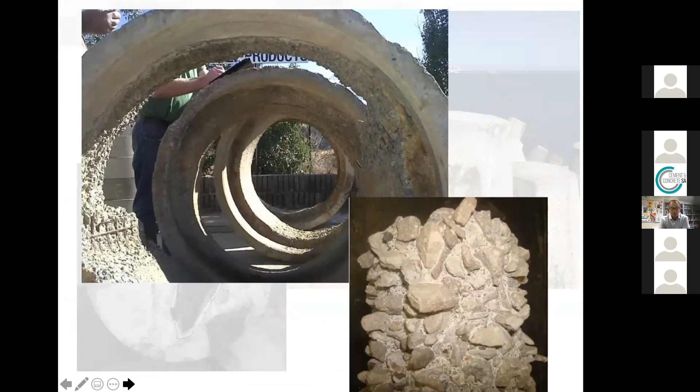We could be talking about acid attack, one of the main issues we have with our infrastructure also in the future, for sewer pipes, for example. We could be talking about shrinkage, cracking in floors or facades and the problems.

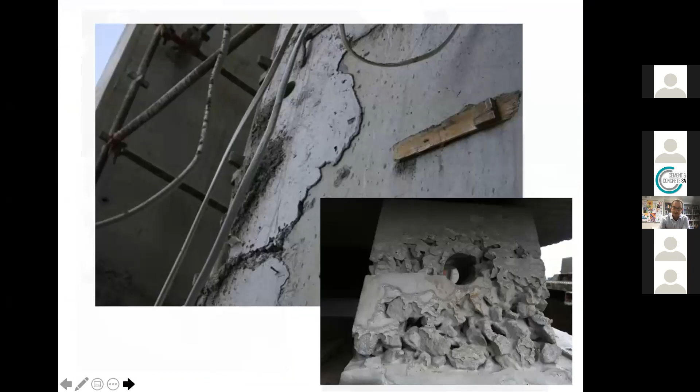We could be talking about construction defects and durability issues, but we are going to focus today on reinforcement corrosion, because that is probably the field in which most of the service life design models, durability prediction models, and design philosophies are being developed and applied worldwide.

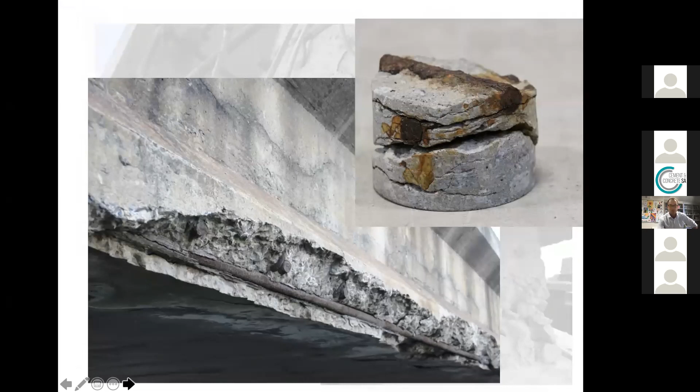And one reason why we do so much research on durability of reinforced concrete structures with regards to reinforcement corrosion at UCT is because Cape Town is located along the ocean, as is Durban and many other parts of the South African infrastructure. And if you look at our infrastructure along the ocean, there are many things you can see.

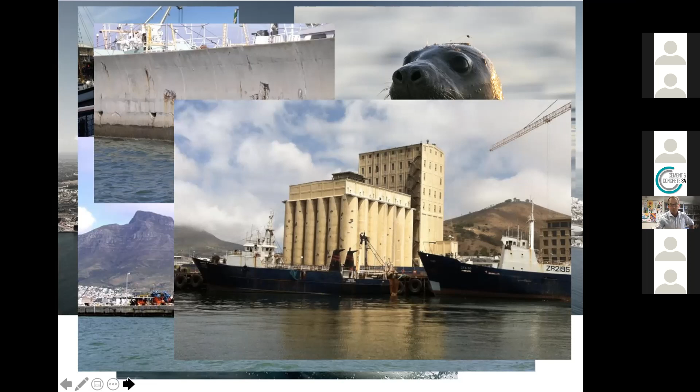So the content of my presentation is I'll give a very brief review of prescriptive approaches for concrete durability design, talk about performance-based design, principles, test methods, also compare what we do to what is being done overseas, talk about current trends, talk about application of these approaches.

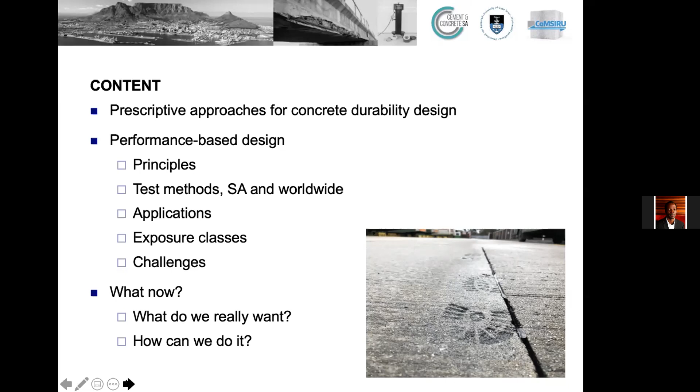There will be changes in exposure classes to be expected in the standards, which I will introduce to you, and put this on the background on some of the challenges we are facing in research and application of durability design methods. And I'll try and tell you after that, what now? What do we actually want to achieve and how can we do it?

Design approaches for durability of reinforced concrete structures. We have prescriptive and performance-based approaches.

The prescriptive approach works on a prescribed concrete mix composition in terms of water cement ratio, cement content, and cement type. Performance-based approaches, on the other hand, work on defining test values.

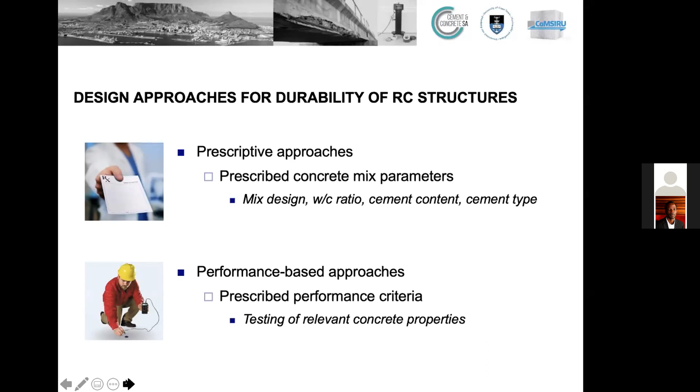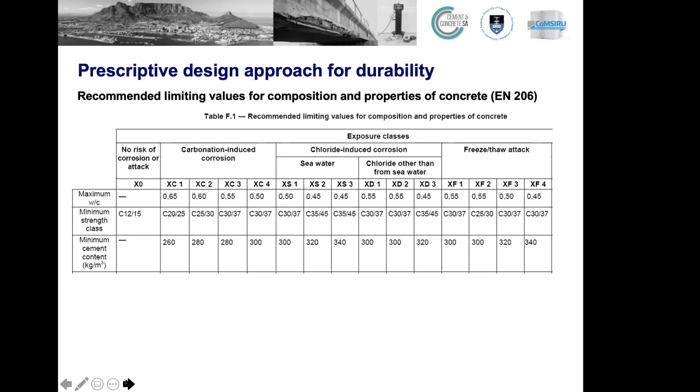Looking at these prescriptive requirements that we find in the Eurocode, which are also very similar to what we find in the current South African standards, for a certain exposure condition, this code gives limiting values for a maximum water cement ratio, minimum concrete strength, and minimum cement content. Essentially this means the code assumes, or the designer is given the directive, that as long as these mix design parameters are met, the concrete will be durable in this particular environment.

The problems with that approach are that there is a weak link between water cement ratio, cement content, and strength with durability. Also this doesn't allow you to exercise innovative or economic concrete mix design, because you always have to adhere to these guidelines, no matter if you find other ways to make the concrete durable. And for the client and the engineer, you cannot account for construction quality and on-site conditions using a prescriptive approach.

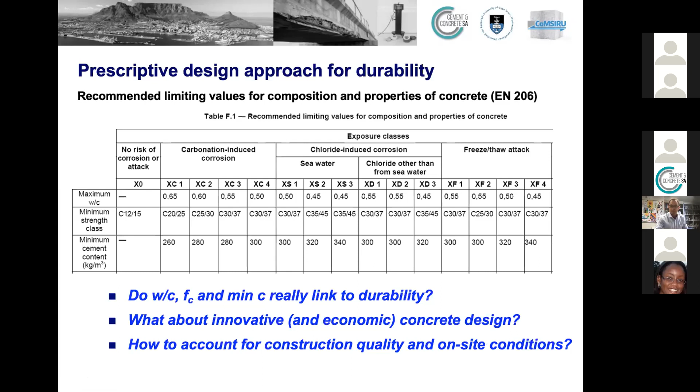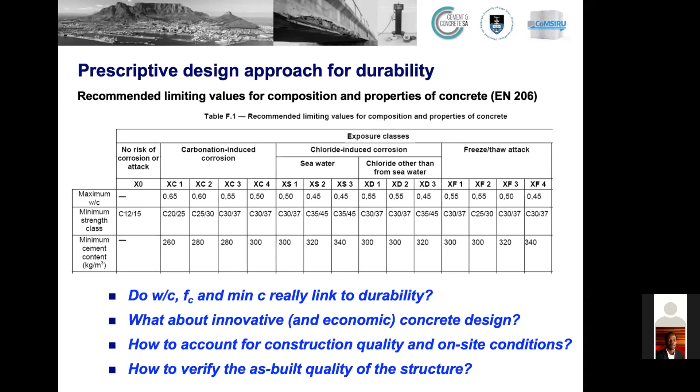Thank you. The last problem with the prescriptive approach is that we cannot verify the as-built quality of the structure. So while this approach has been used for many years to some degree of success, there are many shortcomings which can be addressed by using a performance-based approach.

Here is the definition of a performance-based approach as given by the American Concrete Institute. Essentially, a performance specification defines required test results, which you can measure with a test method, which then form the criteria to judge the performance and verification methods. And now it comes without requirements for how the results are to be obtained.

So essentially, this philosophy says that no matter what you put into the concrete or how you produce it, it is acceptable as long as you verify with a suitable test method that it in fact meets relevant durability criteria.

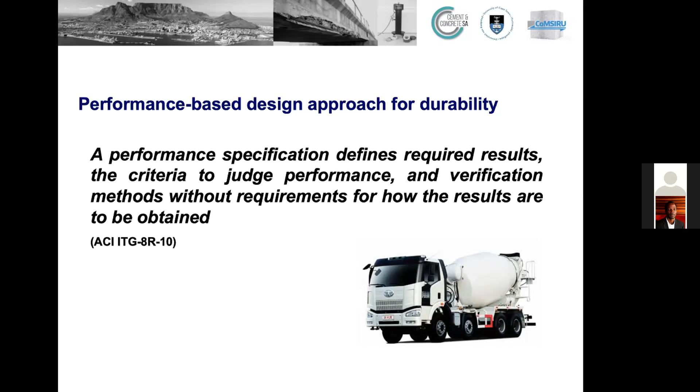Performance-based approaches are of course not new. If you look at, for example, fresh concrete properties and the workability of concrete, what we are concerned about is how well can the concrete be transported, placed, or pumped. How well does it flow around the reinforcement in the formwork? How well can you strike off the surface to give it a certain appearance, and so on.

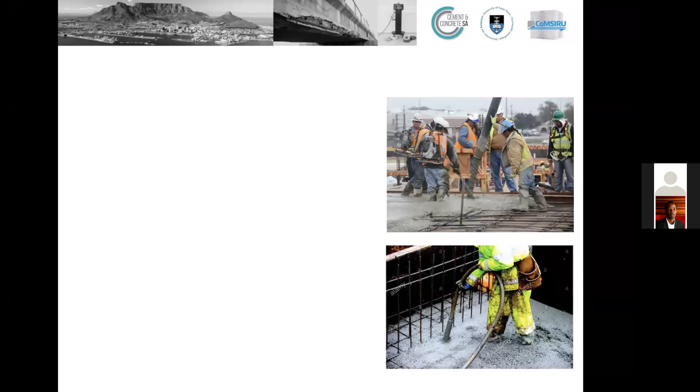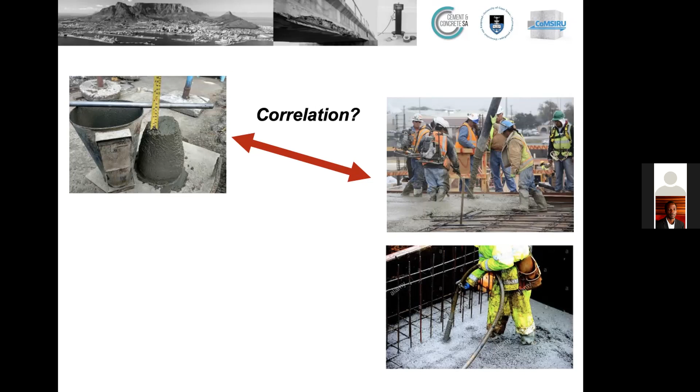All of that relates to the workability of the concrete. And we define workability using the slump test, which of course has got nothing to do with any of those things that I just described. But we have accepted that there is a certain correlation which allows us to use the slump test as a simple indication of what we would expect in terms of workability, even though the test method as such doesn't really reflect on what we're actually wanting to identify.

The same is true for compressive strength. We want to model the structural performance of a concrete structure, for which we need the compressive strength, that is the behavior of the concrete under ultimate stress, which could be very different for a beam or a column or a slab and so on.

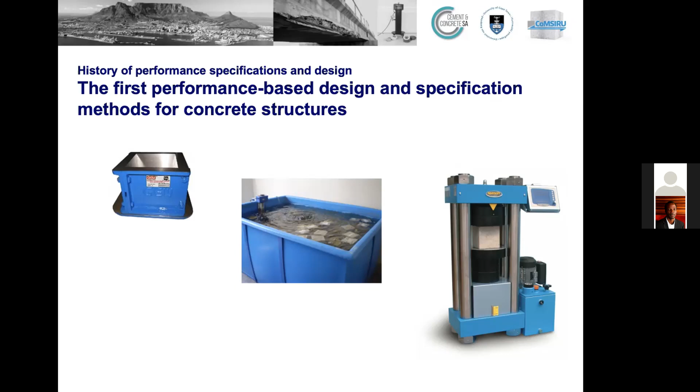How we characterize the concrete for doing so is we cast a cube specimen, put it in water for 28 days, and then put it between two steel plates that move towards each other to crush the concrete. It's actually a tensile test because the concrete fails in tension, but we call this the compressive strength of concrete. And we use that in the design.

And of course, once again, there's a very weak correlation between what we actually measure on the cube and what we have in the structure in terms of stress and strain scenarios and how the concrete would fail in the actual structure. But it's a very useful performance test that we have come to accept.

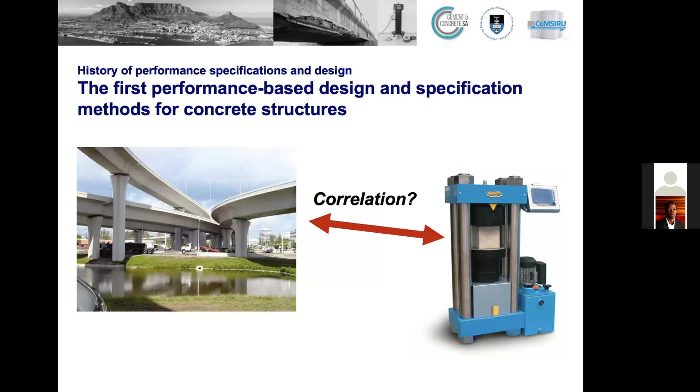Now the same principles can apply when we talk about durability design. In this case, to compare this to the concrete cube test used in structural design, we talk about service life design or durability design. And in our particular case today, reinforcement corrosion.

The most relevant factors that cause reinforcement corrosion worldwide and also in South Africa are carbonation and chloride ingress. So we now define test values that characterize how the concrete is resistant against carbonation or chloride ingress, in the same way as we use the cube test to define how the concrete might behave in the structure under loading.

Once we have defined those test values and once we have test methods, we can specify limiting values for durability for certain exposure conditions.

We can use this approach either in the design stage to identify suitable concrete mixes for a certain environmental exposure and service life, or we can use it for quality control and conformity assessment, to verify that the concrete structure as built meets the design requirements. These test methods give us a good tool to design and test concrete structures to make sure they are durable for the intended service life and exposure condition.

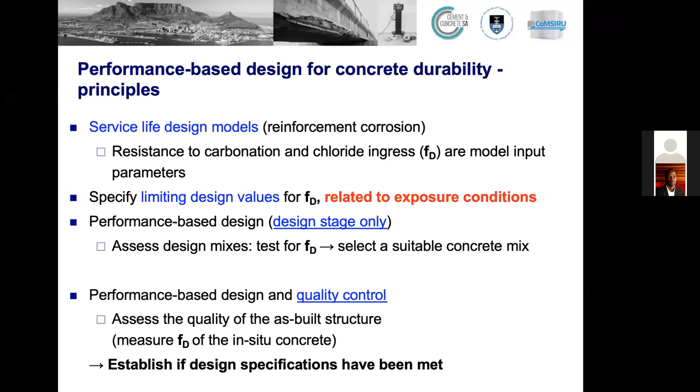Looking at the exposure conditions used to define environmental exposure, there are different ways to apply those in design. We can have standard exposure classes in combination with prescriptive design, picked from a table. We can also have standard exposure classes in combination with performance-based design, which, for example, is something we do in South Africa with our durability index approach, a performance-based approach.

In more sophisticated design environments, engineers can quantify the environmental load, taking into account prevailing site conditions, carbon dioxide concentrations, chloride concentrations, temperatures, and so on, typically done in combination with performance-based design. Quantification of the environmental load can also be done with service life modeling, performance-based design, limit state design, and full probabilistic approaches. So we have four different levels of complexity, each based on defining the environmental exposure the concrete structure is subjected to.

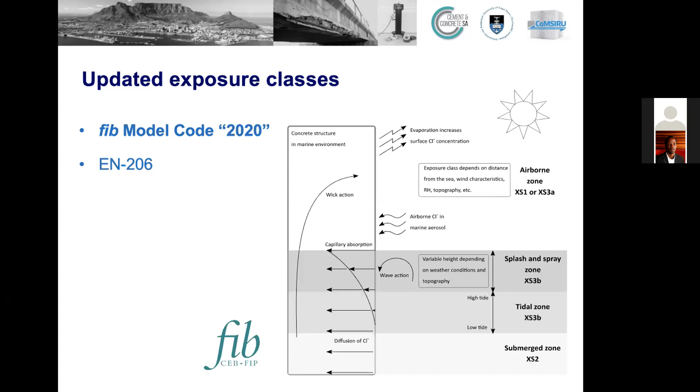Then we have parts of the structure that may be exposed to splash and spray action from the water. Then we have the tidal zone, and we have the submerged zone. Each of these exposure zones comes with a different degree of aggressiveness, and therefore might require different design considerations with regards to mix constituents, mix design, curing, construction, detailing, and so on.

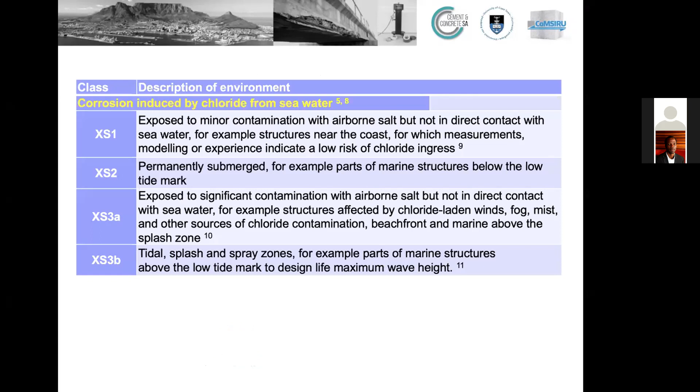Now, what has really changed? This will be the new environmental exposure zones included in the Model Code, and therefore in future most of the other codes. What has changed is that in the past, in the existing codes, we did not assume that airborne chloride exposure is aggressive - it always fell into class XS1, the least aggressive exposure zone for marine structures. In the new codes, there is a statement that you can only assume structures to be in exposure zone XS1 if you can prove there is a low risk of chloride ingress.

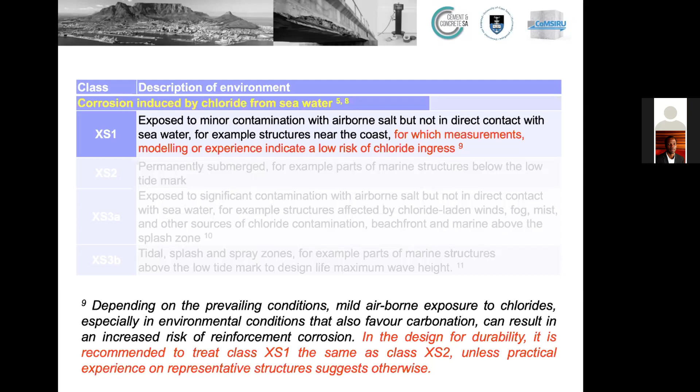That is quite an important change, because we no longer automatically assume that anything without direct contact with seawater is no concern for durability. In the same line, airborne exposure has now been put into the most aggressive exposure class, XS3, where it is defined that the aggressiveness of airborne marine chloride exposure depends strongly on the prevailing environmental and geographical conditions - elevation, wind, fog, distance from the sea, and all of that. So we can no longer just assume that airborne exposure is fine; we have to define whether it is actually a risk or not.

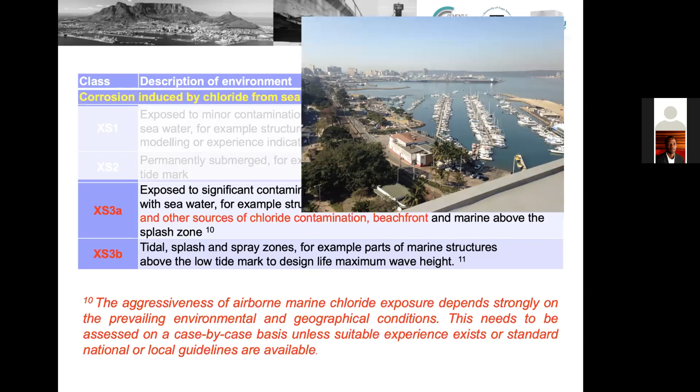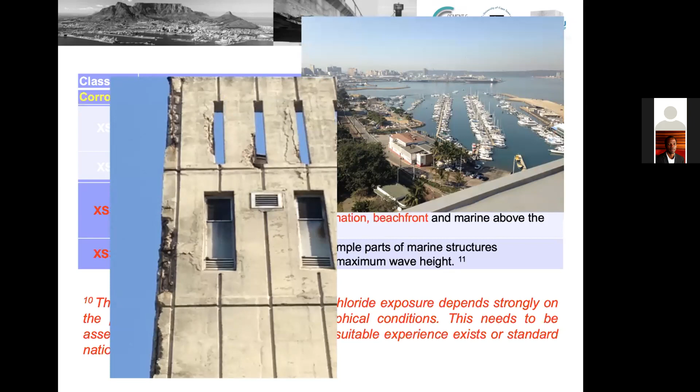Looking, for example, at the problems we have in South Africa - I'm standing here on a roof in Durban, overlooking the harbor. I did a condition assessment of a structure. Looking back at the structure, this is what I was looking at. You can see clearly this part of the structure is not in the splash spray zone or tidal zone - it's all airborne chloride exposure, which has led to severe deterioration of the structure.

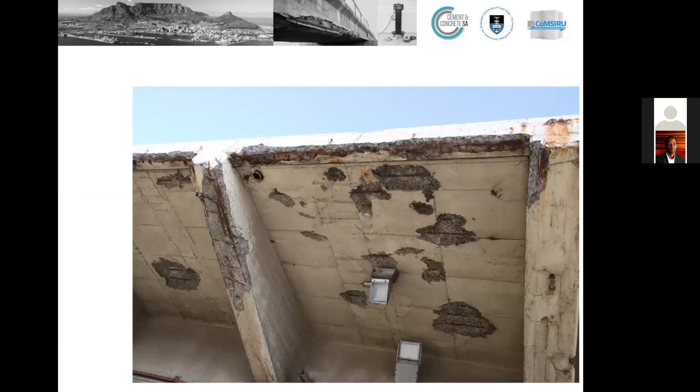The same we can see in Cape Town. This is a structure in Cape Town, also not exposed to direct seawater, but you can see airborne chloride exposure. And on that side it was quite interesting to see that they are warning...

So there are these safety warnings, but what they should actually be concerned about is pieces of concrete falling on the head. It's a risk that is often underestimated. But the point I'm making here is that airborne exposure can be quite severe.

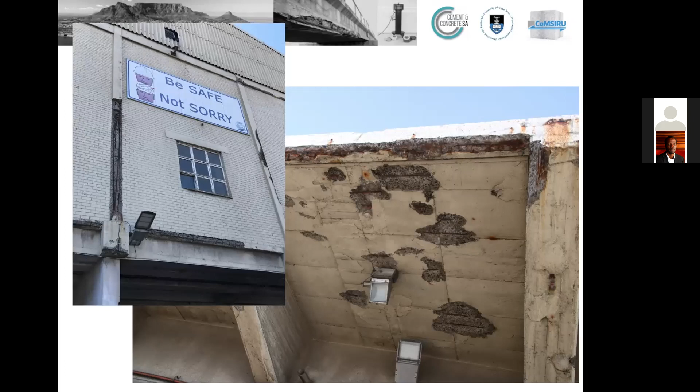And we will in future have to change our design thinking and think closely about where is my structure in correlation to the wind direction and elevation, to make sure we can prevent structures looking like this in the future.

The new codes will also make the recommendation, in order to make design easy, to possibly use the same concrete mixes or the same design assumptions, also cover depth for concrete structures falling into exposure classes XS1 or XS2, meaning airborne exposure that is not of concern, and permanently submerged structures, which typically don't see much corrosion because there's an absence of oxygen that can reach the steel to facilitate corrosion.

Personally, I believe that we should consider airborne exposure, if it is aggressive, to be as aggressive as tidal and splash zone exposure, to make design simple and say either we have aggressive environments or we don't. It doesn't make much sense from a design point of view to really subdivide aggressive exposure further, especially in a conservative design environment.

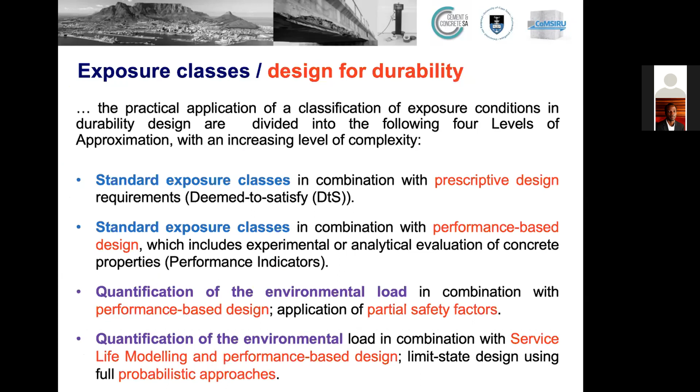Then performance-based design in combination with partial safety factors. That is done, for example, by the universities or by agencies such as SANRAL when they define limiting values that can be used in the more simple way of performance-based design with standard exposure classes.

And lastly, the method that is done mostly overseas in Europe, for example, for large monumental structures, bridges, like large bridges, tall buildings, and so on: service life modeling, performance-based design, and full probabilistic approaches.

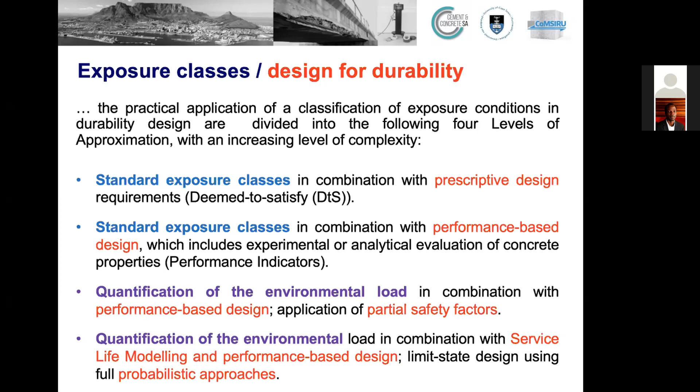There is another method for durability design, and that is called avoidance of deterioration. This essentially includes using materials that will not deteriorate, so stainless steel, or you can use coatings on concrete that prevent ingress. Often engineers don't like to use this because this method is perceived as being expensive and often not necessary.

Engineers tend to shy away from telling the client that they should use stainless steel or a coating and would rather try and make the concrete more durable. Also, if you look at researchers, hardly anyone is doing any research on this because this is just perceived to be not interesting or too simple.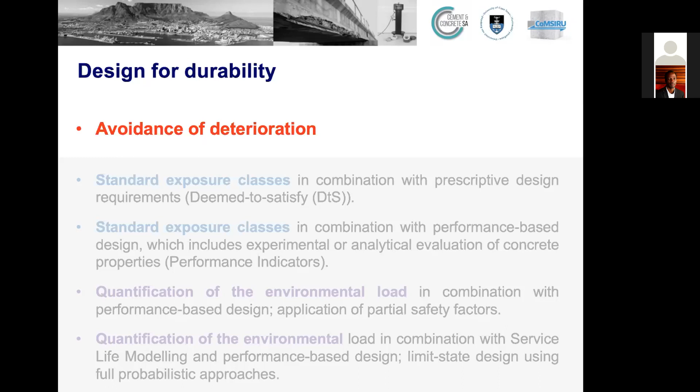So in the community of engineers and researchers, this is somehow being the little annoying sister of proper durability design. And when I talk about annoying sisters, you can see a more recent picture of my kids. You can see how annoying she looks, and you can see how my boys are not impressed with her.

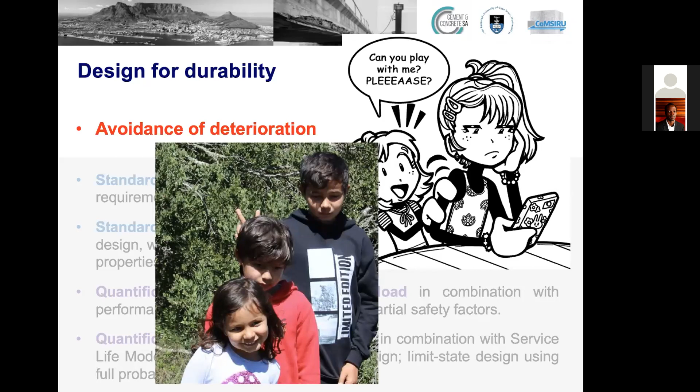I had to think about this when I tried to give this avoidance of deterioration approach a name. I think it is like an annoying little sister that no one actually takes seriously. And I will come back to that point later.

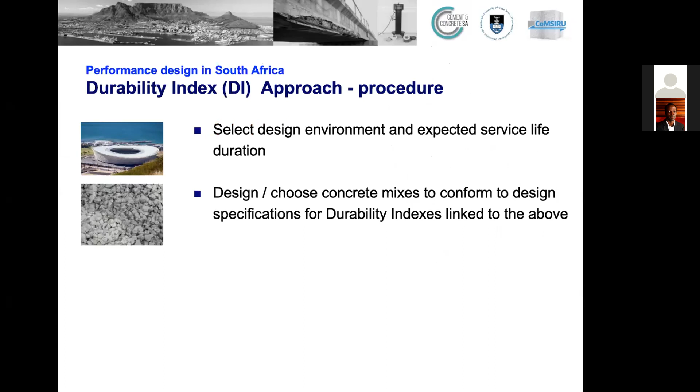Now back to how we do things in South Africa. So the durability index approach, the procedure: the engineer selects a design environment and the expected service life duration. Once we have that, we design or we select concrete mixes to conform to design specifications for durability indexes: OPI, chloride conductivity, water sorptivity.

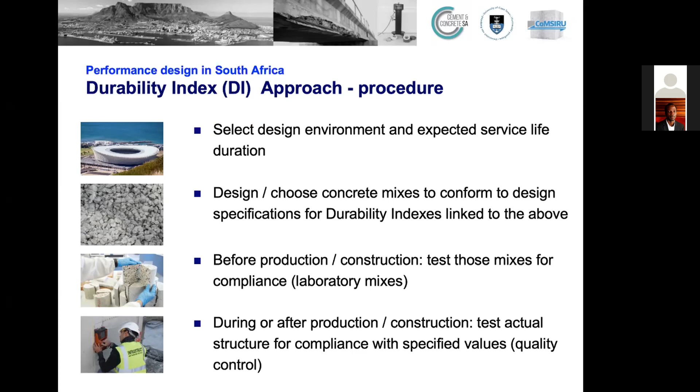Then before production or construction, those mixes are tested for compliance to see whether they are fit for purpose. And then during or after production, we test the actual structure for compliance to see whether it conforms to the specified values. That is the very simple structure of the performance-based approach that we use in South Africa.

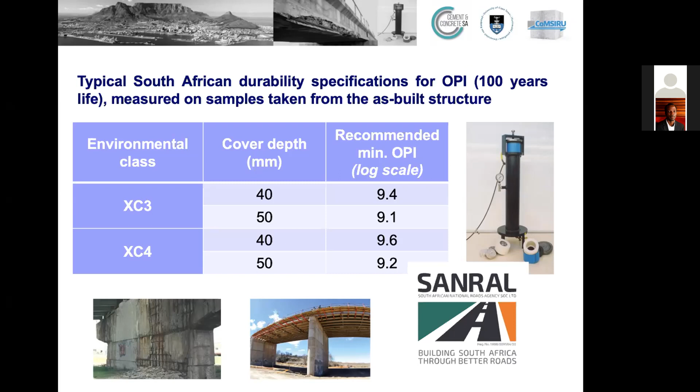And most of you might be aware of this simple example. SANRAL has implemented this, and that's an extract of the design requirements for national infrastructure, bridges, culverts, and so on, for a service life of 100 years. You get, for the different environmental exposure classes and cover depth, certain limiting values for the oxygen permeability index test specified.

Looking at what's happening worldwide, what has been implemented in South Africa, thanks to Edwin Mosley, who I saw is in this meeting. Hello, Edwin. Thank you very much again for supporting this approach, which really is cutting edge, because South Africa is still the only country worldwide using performance-based approaches on a large scale, and has done so for about a decade.

Whereas most of the other countries, or actually all of them worldwide, are still stuck trying to develop suitable test methods, calibrating test methods with service life models, developing limit state design models to then define limiting values for the test methods they are using. But it is certainly a huge trend worldwide that all the major regions - North America, South America, Europe, Asia, Australia - are trying to develop their own performance-based approaches. At the moment the main national guidelines are being updated, including the Eurocode and the FIB model code, and all of these contain much more information and guidance on using performance-based approaches for durability than what you would have found before in the codes.

So certainly we are on the right track in South Africa with our durability index approach.

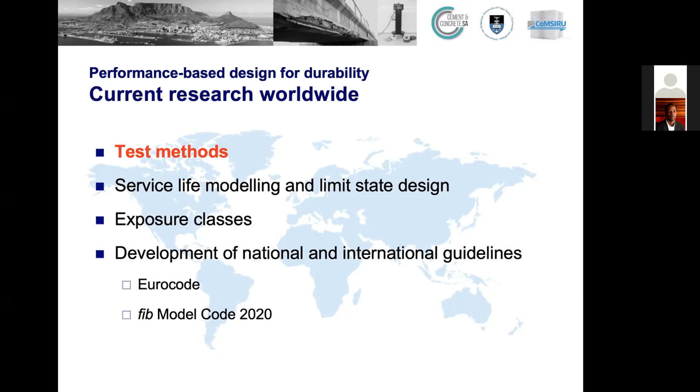Looking at test methods, there are different test methods available throughout the world. We have been involved in some research where we compared different test methods for durability characterization of concrete. We spent some time at a laboratory in the Netherlands and compared different test methods from around the world, from Europe, North America, South America, and Asia. We had all these different experts coming together to try out their test method on these precast concrete elements to see how those test methods compare to each other.

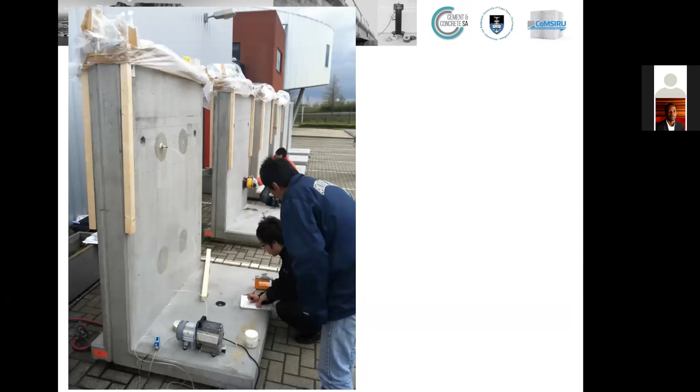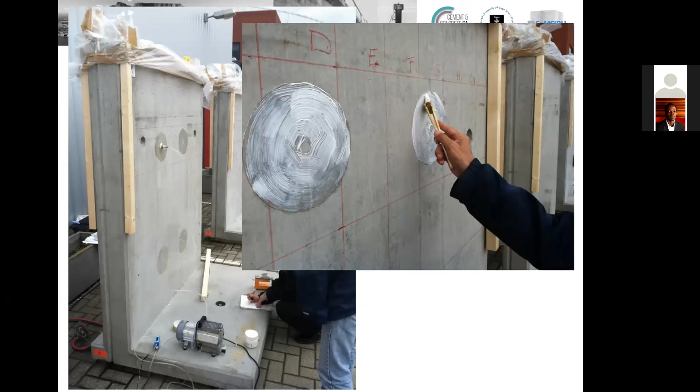What you see in this picture is a Japanese method which measures oxygen or air permeability on concrete, where silicone is applied to the surface with a little center remaining without silicone. On the little center portion, as you can see on the left, the oxygen permeability is measured, whereas the neighboring concrete surfaces are sealed off. Then you can just remove the silicone after measurement.

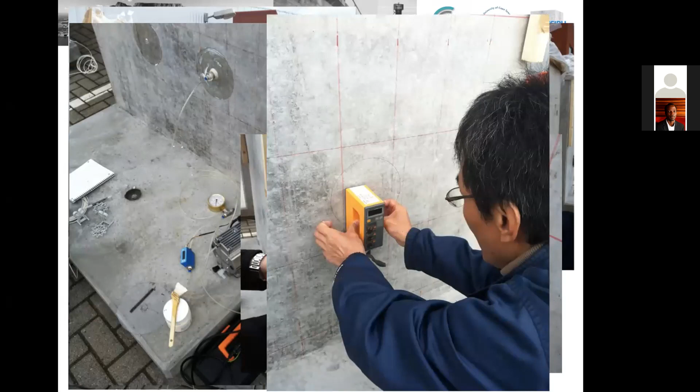Those measurements taken in situ normally rely on using moisture measurements of the concrete as a calibration for what you have measured. We don't do that in South Africa because we take samples from the structure and test them under specified, controlled conditions in the laboratory. So we don't have to account for the moisture content, which is one of the problems of most in situ based methods - you always have to interpret your penetrability test methods with the prevailing moisture condition in the concrete. If you measure these values in different seasons, you would get different values, so you have to interpret the concrete quality accordingly.

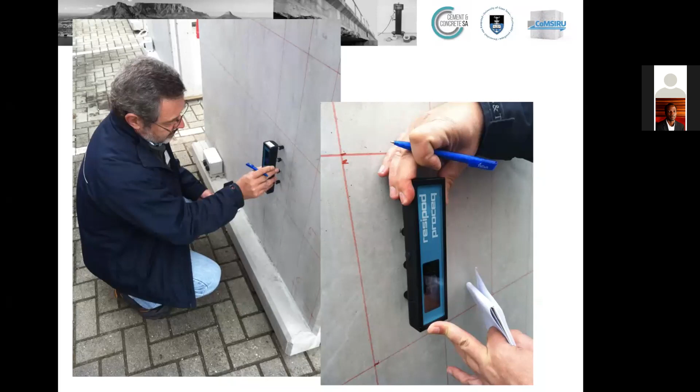Here you see resistivity being measured. We have a similar test - we measure chloride conductivity, again on lab-based samples. Resistivity is the inverse of conductivity, and this test method is largely used in Spain and South America to predict chloride ingress.

Here you see a method from Northern Ireland, where in a localized spot on the surface you expose the concrete to an actual chloride solution to measure how much of that chloride solution enters the concrete, determining the chloride ingress resistance of the concrete.

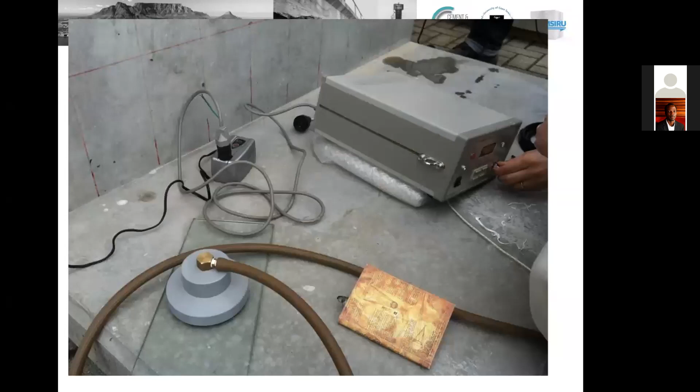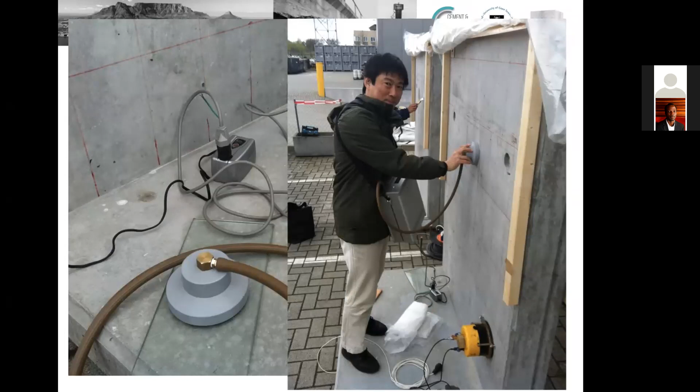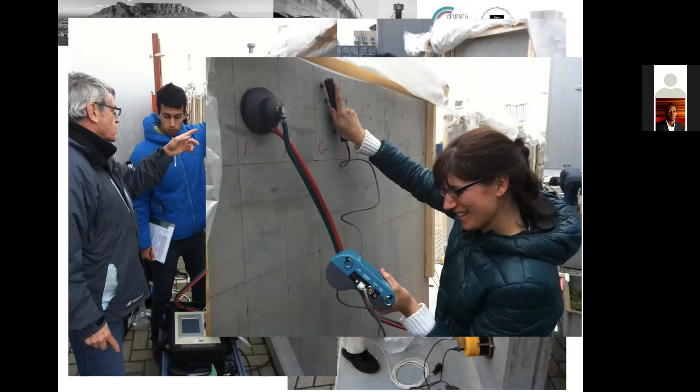Lastly, this is the Torrent test, which measures the permeability of the concrete in situ. A very useful test, similar to the other Japanese test method I showed you, but much more practical. We have also worked with this test method a lot in our laboratory, and it's probably the leading test method worldwide applied for designing concrete structures for carbonation and chloride ingress - the Torrent tester that you can use in situ.

We have compared the Torrent tester to our local oxygen permeability index test. They both work on very similar principles in terms of measuring the permeability of concrete under a pressure gradient. We compared the South African design approaches to the Swiss design approaches where this method is being used.

One way to do this is to characterize the concrete. In our case, we say we have very high permeability, moderate, and low permeability. In Switzerland, they talk about poor concrete quality, good, very good, and excellent concrete quality. We tested dozens of concrete mixes to find that in nearly all cases, we would place the concrete in the same category of quality, which confirms that both these methods have similar merits in identifying the quality of the concrete - quite encouraging.

At the moment, we are trying to identify how we can in South Africa maybe use a combination of the Torrent tester and the OPI test to make use of the advantages of both methods, and more on that in future research. Now, one of the outcomes of all this testing we did on those precast elements with all these methods - we used the test results to rank the concretes in terms of quality.

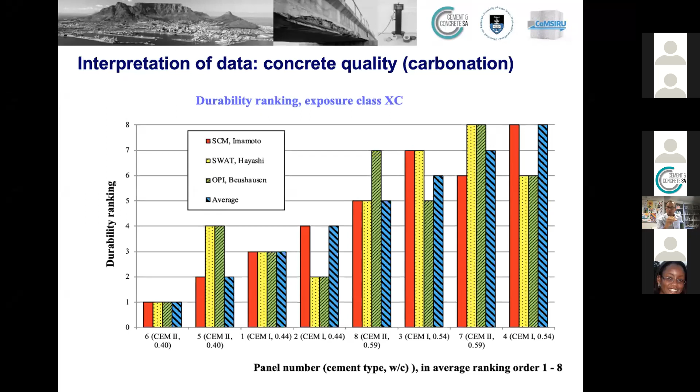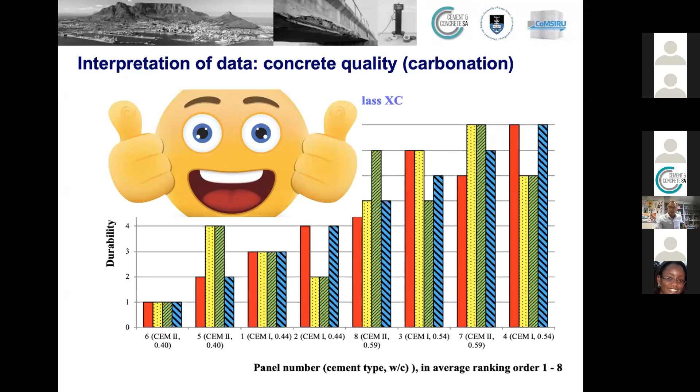What you see here is different methods used to design concrete for exposure class XC, which is carbonation-induced reinforcement corrosion. And what is nice to see here is that, with a bit of scatter, all these methods can agree on the principal quality of the concrete. So I would take this as a positive sign to say that worldwide, developments have led to test methods that give us a similar picture of the quality of the concrete. This confirms that we can use these test methods in the design and quality control of our structures.

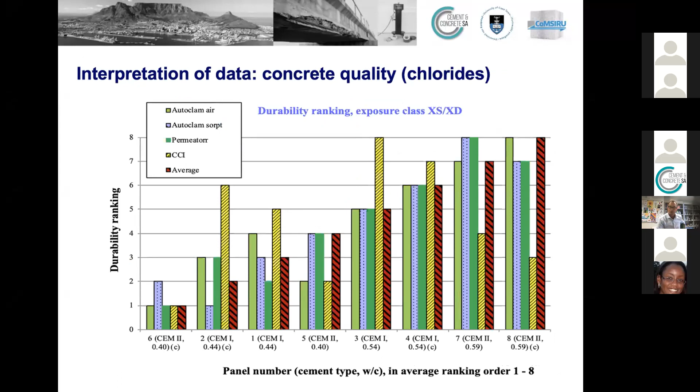Looking at exposure conditions related to chloride ingress, we had a very similar picture where on average the test methods tended to agree. So once again, thumbs up, we are on the right track. However, we also compared the service life prediction, where we use the test values obtained to predict or quantify the service life of concrete structures. And there we have totally different values for different concretes. For example, for concrete A, the values would range between 25 years to more than 100 years. So there was no consensus at all.

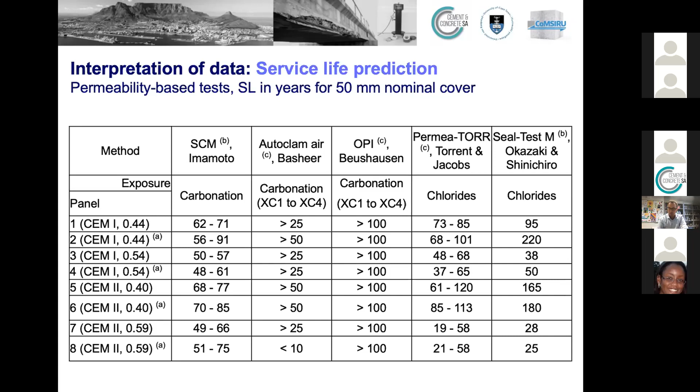So all these methods, while quite useful in rating the concrete in terms of quality, and therefore whether a concrete is more fit for purpose for a certain application than another, they failed in giving a reliable quantification of the actual service life. This tells us that all these complicated methods of designing for durability and probabilistic approaches might actually be quite vague. So I think there's a bit of a warning here as to how we should use all these methods.

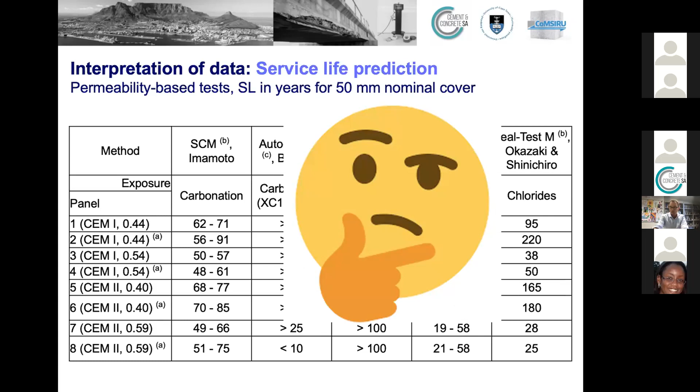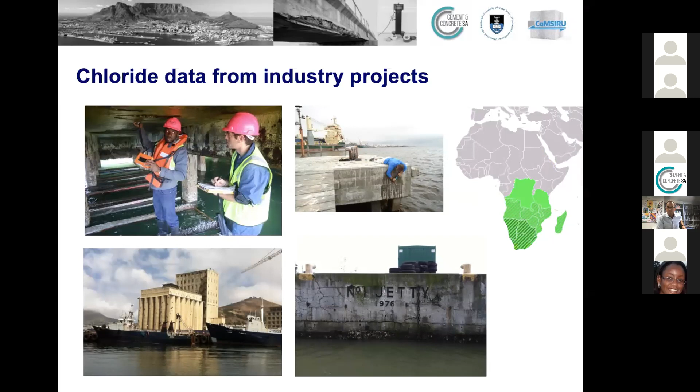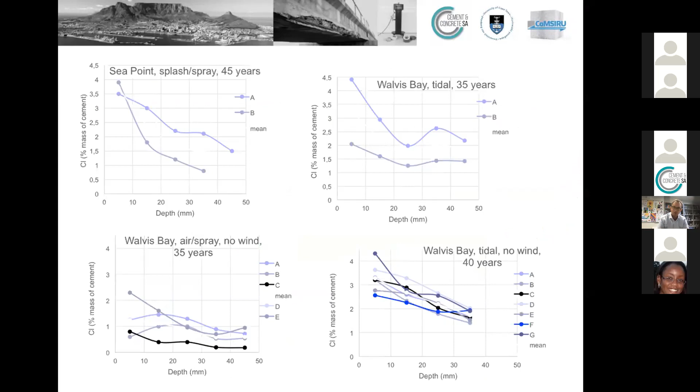To investigate this further, I'm going to give a brief review of some test results on chloride ingress that we obtained from different structures along the coastlines of Southern Africa. Summarized in the various graphs, we took different core samples from a particular structure, from similar elements, and you can see how the test results differ even though they were taken on the same structure. Some more examples here. So what we can see from this is that we got very high variability of test results, even when different samples are tested from the same or neighboring elements.

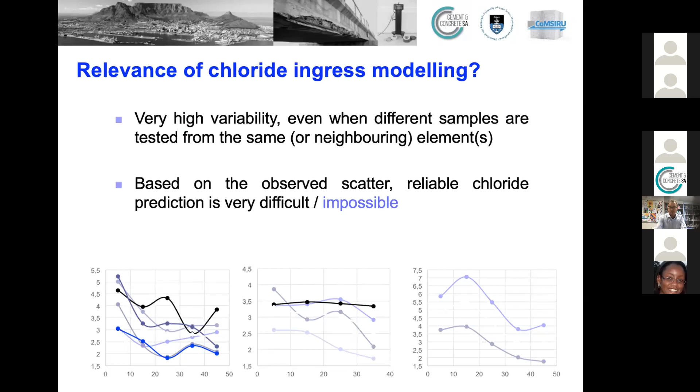Based on the observed scatter, reliable chloride prediction is very difficult, if not impossible, to achieve, which once again speaks to the point that it is quite difficult to model durability in a way that gives us a quantification of the service life. This points out that these more complicated methods to design for durability might be slightly inaccurate. So when we use our service life models and diffusion models to model chloride ingress, the question is: how applicable are these really in the field?

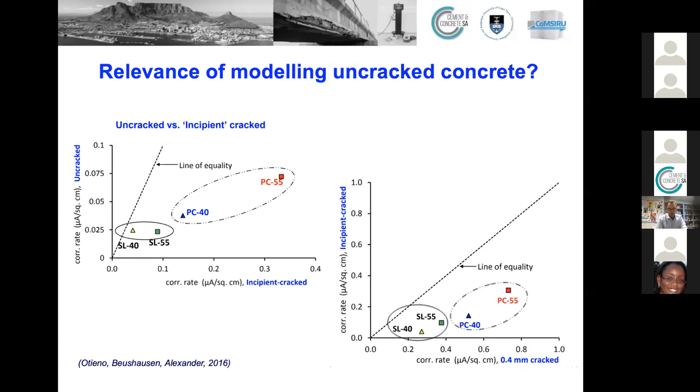On the bottom right, we are comparing hairline cracks to cracks of 0.4 millimeters crack width. So what these graphs show is that even though we measure penetrability on uncracked concrete samples and use that in our service life models, in situ we can possibly very often expect much higher corrosion rates, because our concrete is very often cracked from shrinkage or structural cracks and so on. This once again speaks to our approaches for service life modeling not being very reliable or relevant.

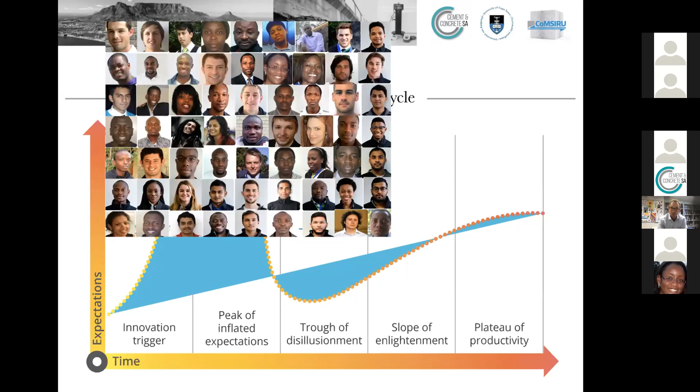Normally after about 2, 3 or 4 weeks, they are right up there and they are full of motivation and they think they can change the world and they have it all figured out with their research. And as they go into the literature, they find out how complicated it is, and how little influence their work might have on the overall picture, and they fall into this stage.

If they take 2 years to do their masters, they maybe hover around here for about 16, 17 months, and slowly we help them out of that through good supervision, so that at the end of their masters, they come up with something that is actually quite useful and forms one of the puzzle pieces we need to make a good difference to our engineering society.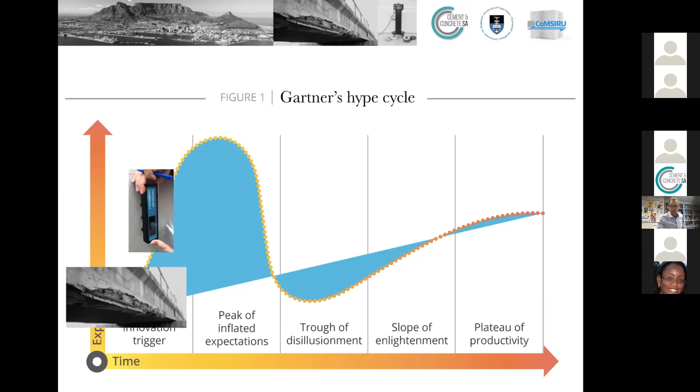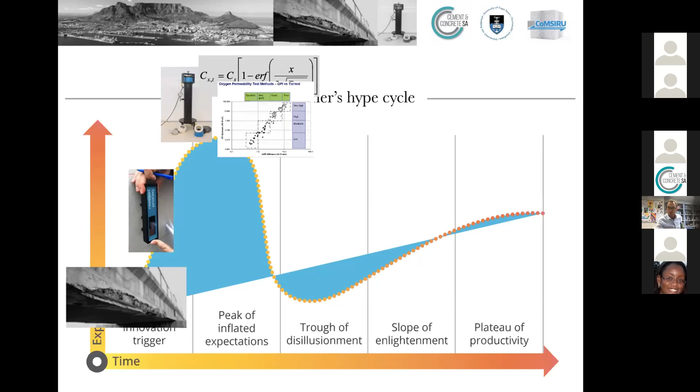Look, applying the same principle to durability design and looking at my own experience here, this is now my Gartner's hype cycle from the last 20 years. Starting with the problem of deterioration of our infrastructure and how urgent it is, followed by all the nice developments we've made in test methods, durability design, service life modeling, chloride ingress modeling, our test methods comparing to overseas test methods. That's all absolutely awesome and points in the right direction. If I then think about the limitations in terms of accuracy and cracked concrete versus uncracked concrete, I wonder whether we're actually maybe trying to be too positive.

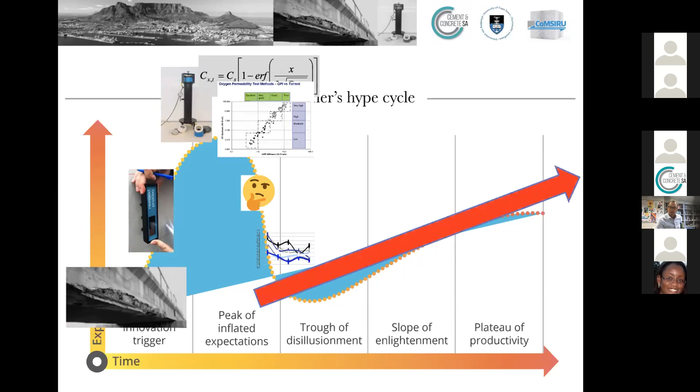But looking at how we can get back up again in terms of making sense of all this, I think about how we need to apply our knowledge and our research here. We need to know the limitations of our durability design approaches, and we need to use the approaches we have in a sensible fashion to make sure our concrete structures are more durable than what they would be otherwise. So we accept the limitations, because overall our aim is to improve the durability of our structures.

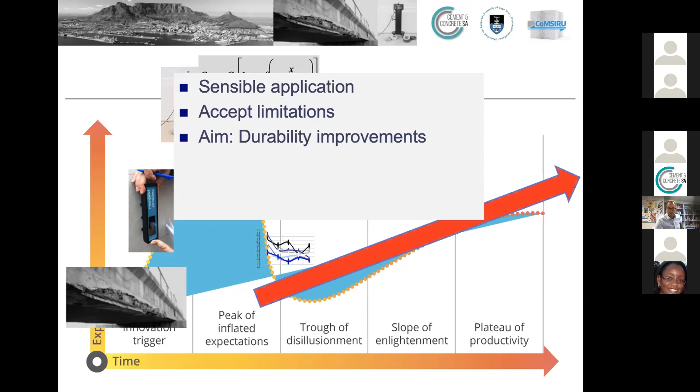And I believe with this performance-based design, even though it has limitations, we certainly can much better design structures for durability compared to the traditional prescriptive approaches. Also, of course, these test methods allow us to do proper design specifications, quality control and conformity assessment. So I do believe that we are on the right track, even though these approaches might not give us as much as we had hoped maybe 10 years ago. That is my personal assessment of what is being done worldwide in terms of durability design.

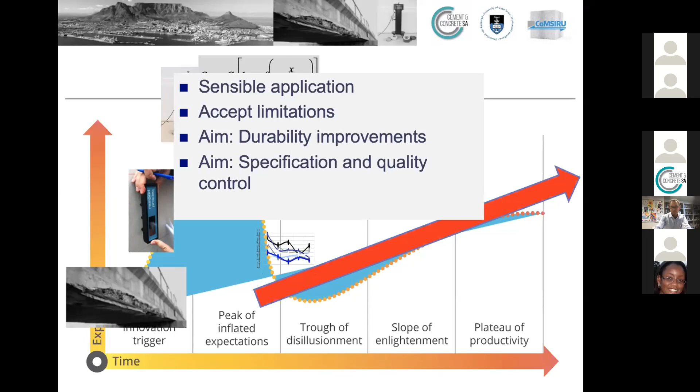Coming back to the actual aim, the underlying aim of all of this - service life modeling, durability design, exposure classes - all of those are just objectives or methodologies to the aim of providing more durable concrete infrastructure. I think there's a simple solution. Coming back to this little annoying sister that I mentioned earlier, looking at the avoidance of deterioration approaches.

So we have recently done quite a bit of research on using hydrophobic coatings on concrete to increase the service life. This is a paper that you can expect to come out sometime soon in Concrete Beton, I think the next issue, which was co-authored between myself and Harris Sohawan, a previous master's student at UCT.

So what we did here is we wanted to find out how we can use those hydrophobic impregnations to produce durable concrete structures and determine how much the design cover can be reduced through the use of hydrophobic impregnation, to give engineers a quantification method to determine the effect of using this approach - avoidance of deterioration. So we evaluated the effectiveness of hydrophobic impregnation in poor concrete and also cracked concrete to see how we can extend the service life of our structures.

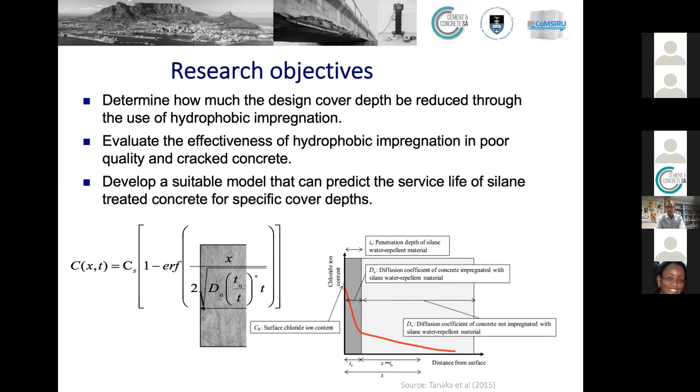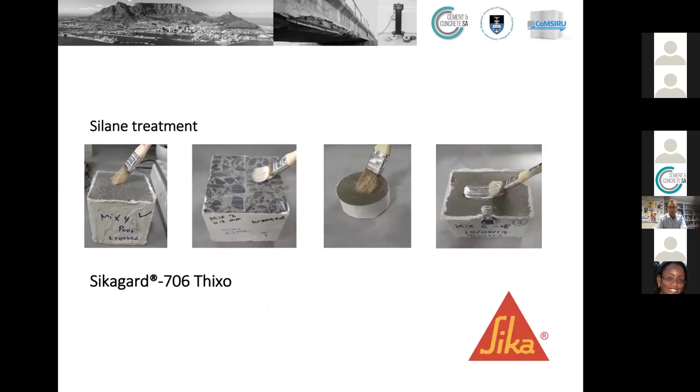We used a Sika product. This research was sponsored by Sika, and we measured bulk diffusion, meaning we put concrete samples, treated and untreated, and different types of concrete samples in a chloride bath and measured chloride ingress with time. These are the test results.

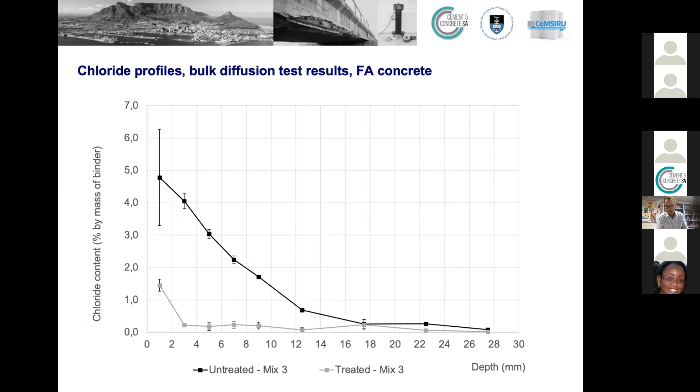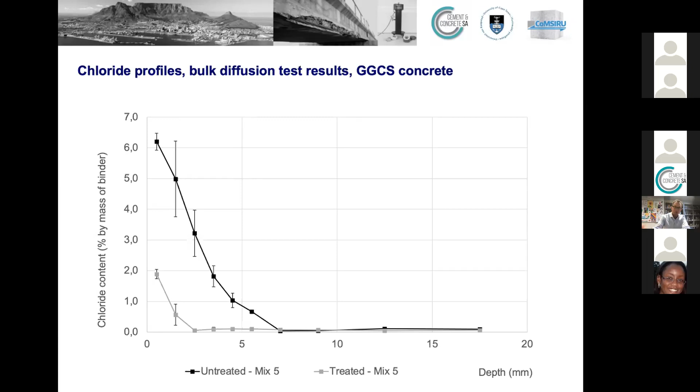So we then analyzed these curves for diffusion coefficients and chloride surface concentrations and so on, to do some service life modeling.

This is the outcome of the service life modeling, where we compare the required cover depth versus the time to corrosion for the different concrete types we measured. For example, looking at a fly ash concrete, assuming we want 100 years of service life, for a fly ash concrete with a water-binder ratio of 0.45...

...we would need about 50 millimeters cover depth to achieve a service life of 100 years in the tidal splash zone. For the treated concretes, we only need 10 millimeters. I'm not advocating we build structures with 10 millimeters cover, but this shows that instead of 50 mil cover, we could possibly get away with 30 mil or even 25.

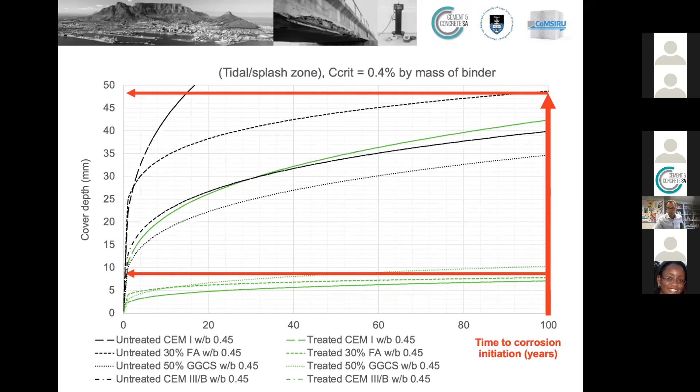Or we can look at concrete structures that have been constructed with too low cover or too low concrete quality, and use hydrophobic coatings as a treatment to still achieve durability. Personally, I believe that if we were to coat or apply hydrophobic sealants on all our concrete structures in future, we would never again have to deal with condition assessment, concrete repair, and so on, at least not on these newly built structures.

So we would never see situations like this on our newly built structures. Applying these surface coatings or hydrophobic sealants would allow us to produce durable structures at very low cost. It doesn't change the appearance of the structure, and you don't have to do all this design around it. You can just follow this very simple design approach, providing durability by avoiding deterioration.

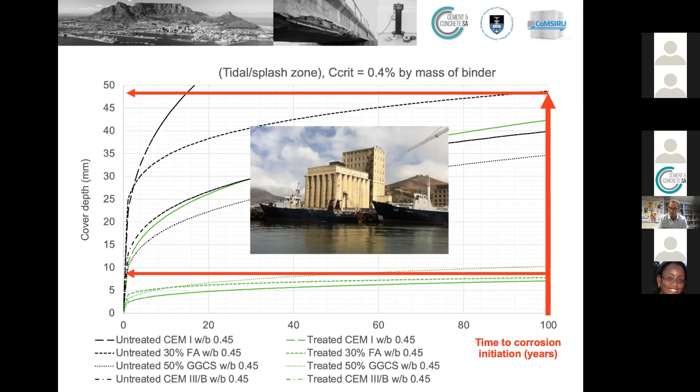And this speech has not been sponsored by Sika, even though it should have been. But I really strongly believe that as engineers, we should look back at aiming at providing durable structures, and this is a very simple way to do it.

So in conclusion, performance-based design approaches are being developed worldwide. South Africa is still at least one step ahead, even after a decade of applying these approaches, because the rest of the world is still trying to grapple with them and implement them in practice. We will see an update on exposure classes as discussed. We will have to accept the challenges and limitations of our design approaches, but also these approaches, even with their limitations, have advantages and opportunities to provide design solutions, conformity assessment, and so on.

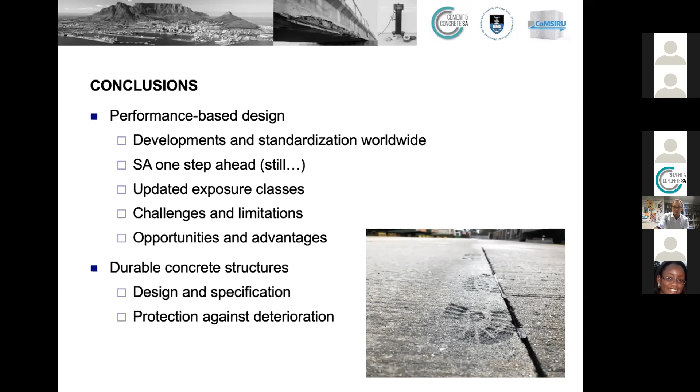Protection against deterioration, as I said, is to my mind possibly one of the most effective ways how we can in future make sure that our concrete structures are durable for the intended service life. And that's all I have for you. Thank you very much.